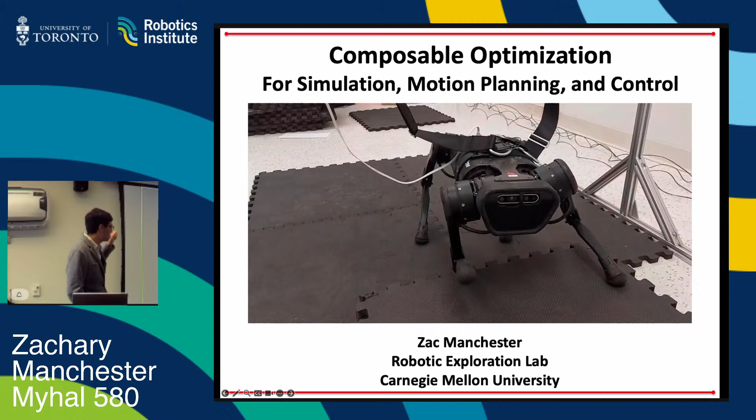So the stuff I'm going to talk about is this deep rabbit hole I got started down as a postdoc, trying to think about how to reason about contact interactions on robots, and trying to wrap my head around that. And I guess 5 or 6 years later, I kind of landed at this made-up name for this stuff, I call it composable optimization.

And the way they drive the rover, there's basically a whole team of rover drivers. When they get to a tricky spot on Mars with a big rock or whatever, a narrow passage, they basically take a bunch of imagery, and then they go out in the Mars yard with shovels and a backhoe, and they recreate the scene in this sandbox in Pasadena, and then they figure out how to drive the rover, and they practice a bunch of times until they get it just right, and then once they've gotten it just right, they uplink the commands to the rover, and it executes them.

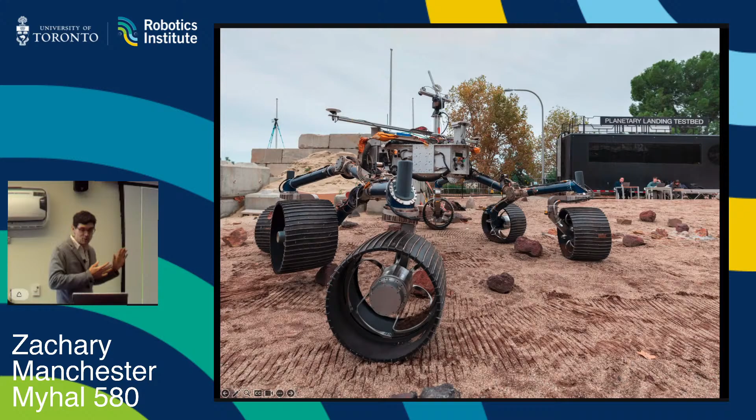So from there, I'm now going to go through a few parts to the talk.

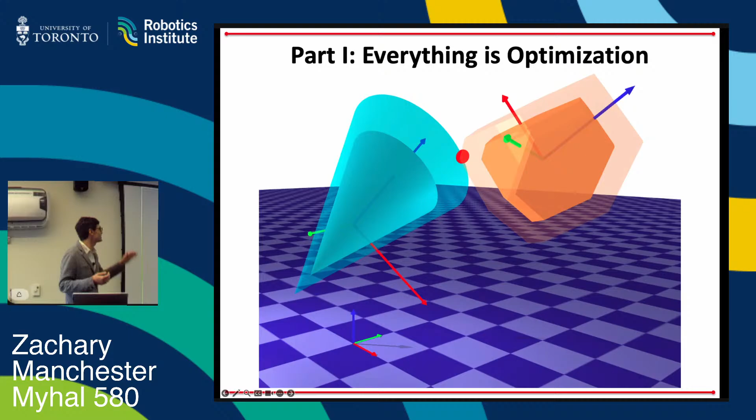Part 1, I'm gonna try to convince you that almost everything, maybe everything is a bit of an overstatement, but almost everything we need to be able to do this kind of stuff, to recreate the mountain goat with robots, at some level is optimization. So just a quick tour of things that are optimization.

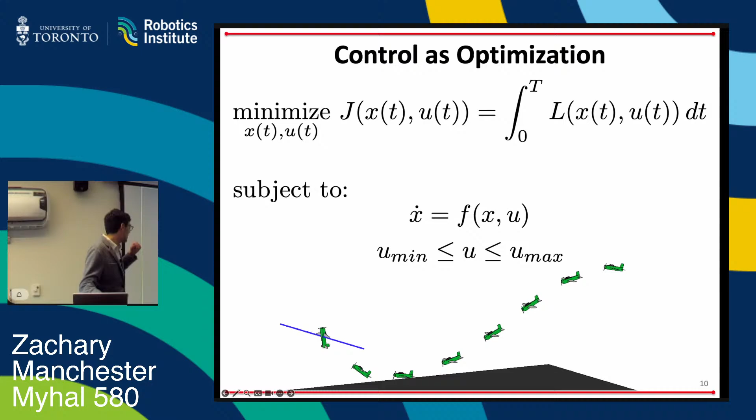The first one that I'm sure everyone is well acquainted with is control. And whether it's model-based optimal control or RL or whatever, at the end of the day, all of these come down to some kind of optimization problem. I'm more of a model-based guy, so this is the way I think typically, but this encompasses RL as well.

So you have some model of your robot, that includes maybe it's either a learned model or your F equals MA kind of stuff, and then maybe some constraints that define your actuator limits or this kind of thing, or safety. And then you write down some kind of objective function, cost function, reward function, whatever you want to call it, that basically encodes the behavior that you want. And then if things are relatively benign, you take this and you discretize it and throw it on your computer and you get an answer. You get a control policy, you get a trajectory, however you want to do that.

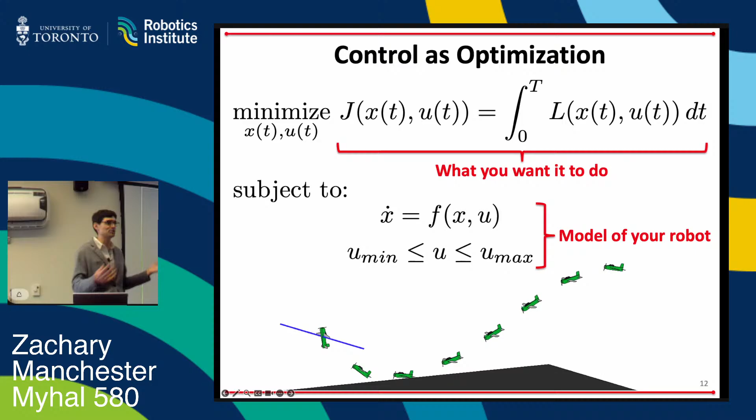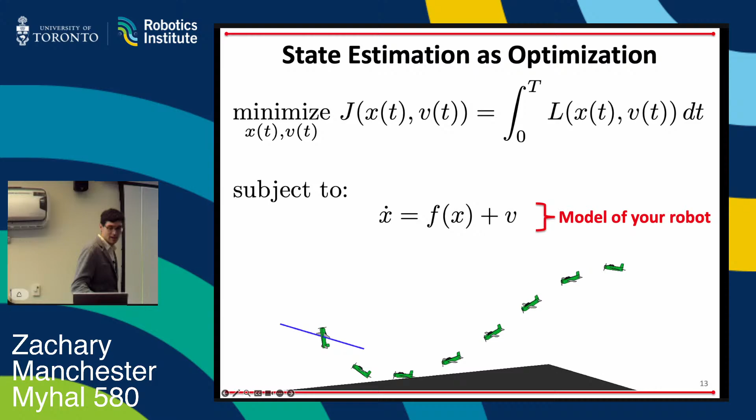So control, similarly, state estimation is an almost identical optimization problem. So figuring out where you are, pose estimation, all these kind of things, also optimization problems. Basically the same thing. This one is a little weirder, and one that, as a physics undergrad, I became acquainted with early on in life, but I think a lot of people in computer science are less acquainted with this idea. It turns out that physics is also, or can be, posed as an optimization problem.

And it turns out, this is very uncommon, but there's no reason we can't solve this problem the same exact way we solve trajectory optimization problems. We can discretize this thing in time, and then directly minimize it on a computer. Why might I want to do this? Well, this seems maybe expensive and weird, and why do I need this if I have my nice ODE solver, Runge-Kutta method, whatever. And it is more expensive, but I think there's some pretty interesting things that you can do here.

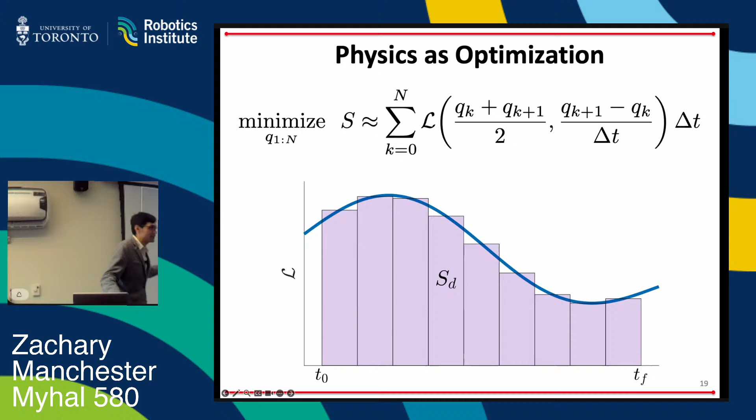So if you take this perspective of this is just another optimization problem, one of the really cool things you can do is add constraints, just like we could add constraints in our motion planning problem. And in particular, the kind of constraints that we're interested in a lot in robotics are around contact interactions. We're all maybe familiar a little bit with simulating systems that undergo contact interactions. It's terrible. You get soft contact models that are super stiff, or hard contact models that are non-differentiable.

There's all this kind of crazy stuff. It turns out that if you just take this optimization approach and double down on this Hamilton's principle, the true trajectory is the one that minimizes this cost function. Well, now I can just slap on any kind of constraints I want, and it's still a perfectly reasonable optimization problem, and we have good algorithms for solving these kind of constrained optimization problems. An example of this would be, say I have a brick, and this is the F equals MA stuff, and I want to simulate the brick hitting the ground and sliding or whatever. All I've got to do is put an inequality constraint on there that says the brick is not allowed to go through the floor.

So this would be a signed distance function that has to stay positive. And if I slap that on there and just minimize this problem, out comes impacts. And in all the ways you would expect, basically, the Lagrange multiplier associated with that constraint becomes the normal force, all the usual stuff. And it just works. And you don't have to do any weird hacky things. It's stable, all the nice things.

Similarly, if we want Coulomb friction, maybe some people have seen this before, this is called the maximum dissipation principle. A few people have seen this maybe. Same deal, it's an optimization problem. You get all this weird, nasty, non-differentiable stick-slip behavior with friction. Turns out it's just a solution to an inequality-constrained optimization problem. So if you're willing to solve an SOCP at every time step, you get Coulomb friction, it's super clean, it works, you don't have to have creep in your simulator, it's very nice.

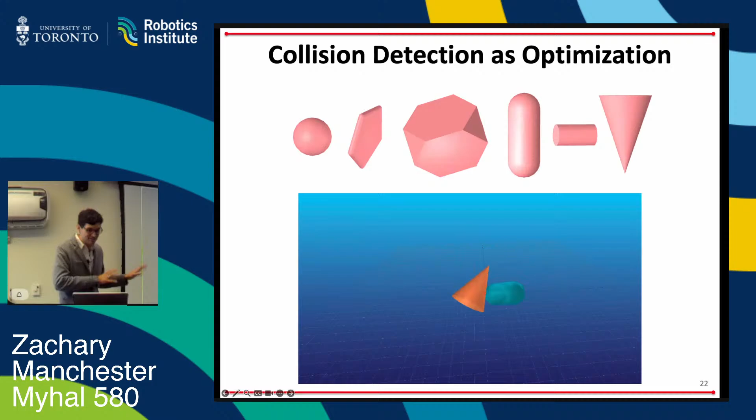Hopefully it's clear that we can do this. Okay, so if you will suspend your disbelief for a minute and trust me on that one. Then part two is, how do we put all these things together? So I just showed you, basically every single one of these blocks I can pose as an optimization problem. If now I say I want to put all that together and solve the big motion planning or control problem for a big robot, that's the mountain goat robot, right? It needs to reason about the environment and the contacts and all of its dynamics and friction and geometry and all this stuff.

If I have clean optimization formulations of each block, now I have this problem that when I go to solve the control problem, these are all coupled in really complex ways, right? So this is what I mean by composable optimization. How do I take all of these separate problems and squish them together and somehow jointly solve them all in a reasonable way to get ultimately what I care about, which is my controller, out of this thing at the end, right? Okay, so that's what we're after.

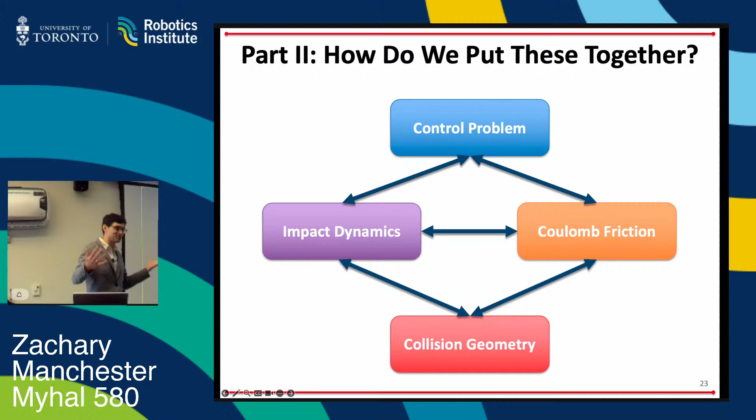The first one is the so-called hybrid approach, and what we mean by this is if you're able to pre-specify the contact switching events, so basically when I touch down and lift off with my foot, say, I can bake that into the problem and then basically ignore it as far as the optimizer is concerned and only optimize over the smooth segments between impact events. This is great. It basically gets us back to the smooth problems we know how to solve, and there are great methods that can do this. The problem is I need some oracle to hand me the contact mode sequence.

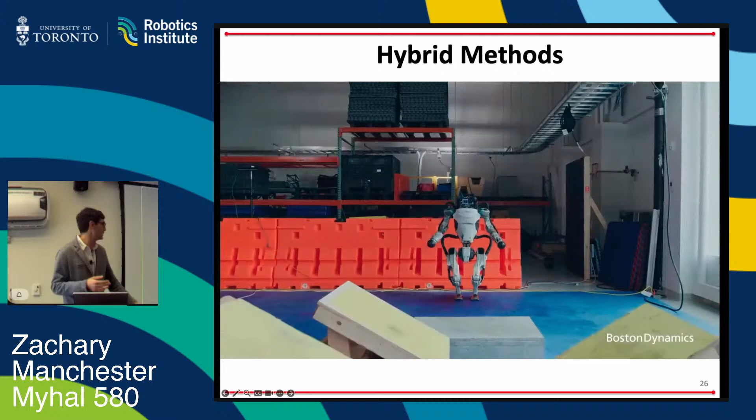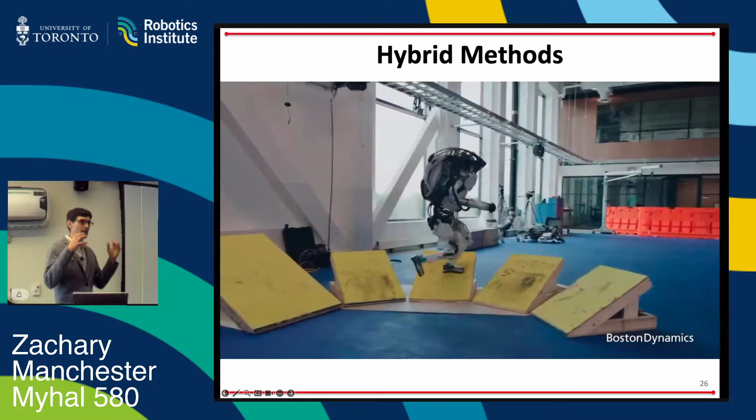Okay, so that's that. That said, these hybrid methods have been hugely successful, most notably this stuff that everyone's seen before. Roughly speaking, from what we know publicly and from friends, what these guys are doing is solving a big nonlinear model predictive control problem with a bunch of those footstep planning heuristics and doing exactly this hybrid thing. So it can work extremely well. This is the state of the art, this is amazing.

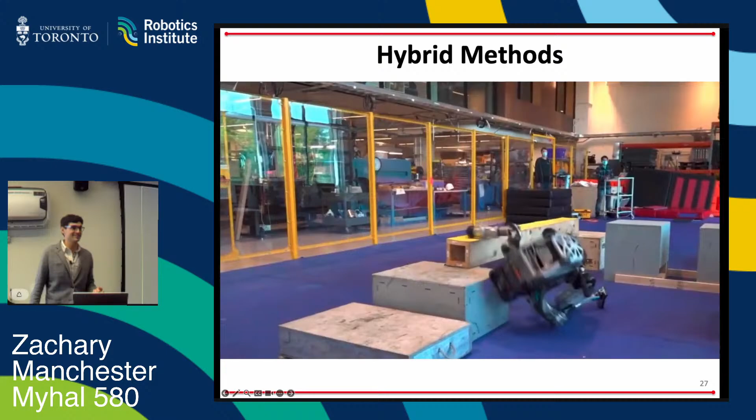That said, we've probably also seen some of these blooper reels. And if you look really carefully at this stuff, what you'll note is that most of the failure cases, especially look here, are due to unplanned contact events. In that case, it's trying to jump over, and its contact planner has said, oh yeah, use your hand, but where it grazed its foot, that was an unplanned contact event. In this kind of hybrid approach, one way of thinking about it is the controller is essentially running open loop on the contact modes.

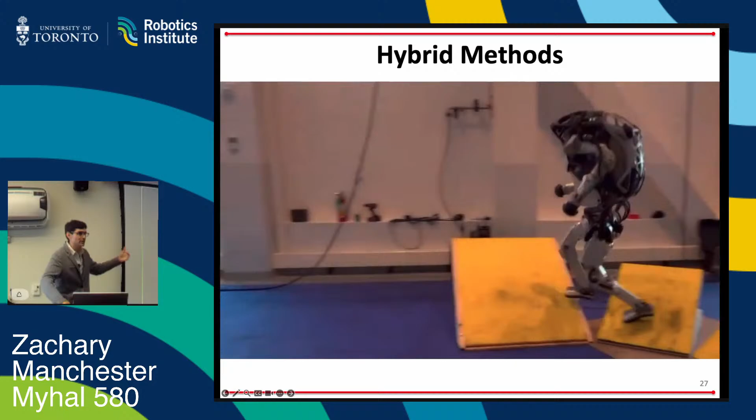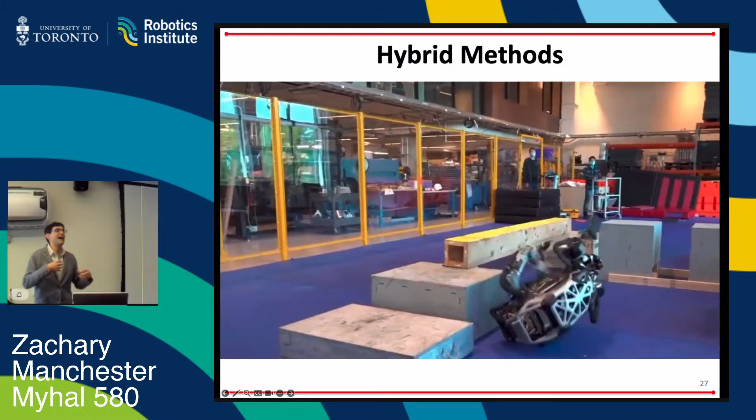So if your planner says your hand's in contact and your feet are in the air, that's all it knows about. If during that maneuver some other part of the body hits something in the environment, the controller cannot reason about it. It does not have that in the model. And so it just kind of barfs. In practice, the way you deal with this is by having all kinds of contingency plans, like, oh, this other mode might happen, and you try to run these in parallel, but it quickly becomes this combinatorial mess to deal with these pre-planned contact modes. Okay, so it can be awesome, but it has some shortcomings, this hybrid thing.

The other way to go, which is what we're now going to get into and what has been my obsession for several years, is the so-called contact implicit approach. And this is kind of the dream. The idea here is instead of having these pre-planned contact modes and effectively just optimizing over the states and controls, you also want to reason over the contact forces and all of these potential contact interactions. So there's been some work on this over, say, the last decade or so. We've done a bunch of stuff on this.

The dream here is that you can generate complex contact-rich gaits, manipulation trajectories, all kinds of stuff. But I would say so far the issue fundamentally comes down to dealing with those non-differentiable contact interactions, and there's just severe numerical issues with this. So trying to figure out a way to formulate this problem in such a way that you can tractably optimize through these contacts is the key thing here. Okay, so that's what we're trying to do. That's the framing and context for this.

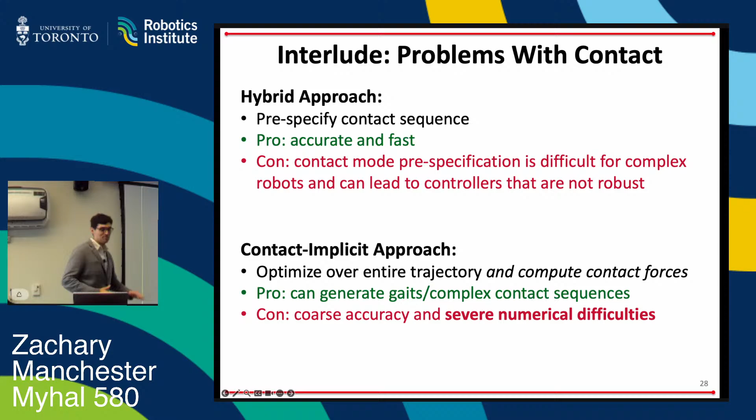Okay, so here's how we're going to do it. The key idea is that we're going to zoom in on one of those blocks, and in a very generic way, I'm going to write it like this. We have an objective function, and for simplicity right now we're going to just focus on inequality constraints, which are the impacts and things like that. We'll ignore everything else just for clarity. Okay, so I have this problem. The first thing I'm going to do is write down an interior point method to solve this problem. Who's seen this stuff before?

A couple people. So the idea with an interior point method is I take those inequality constraints and stuff them inside a function called a barrier function that blows up at the boundary of the constraint, and I stuff that into the objective function. I'll draw the picture in a sec. So I take the constraint and stuff it inside this log. The reason this works is the log blows up as you approach the constraint boundary. As long as I start with a feasible point inside the constraint set, this moves the constraints into the objective. It also takes that inequality constraint and effectively smooths it out, and you get something like this that's globally differentiable, as long as I'm in the feasible region. I also get this little parameter up front of the log, a fudge factor that I can use to tune the degree of smoothing. And in the limit, this curve approaches the brick wall and gives you the exact answer to this problem.

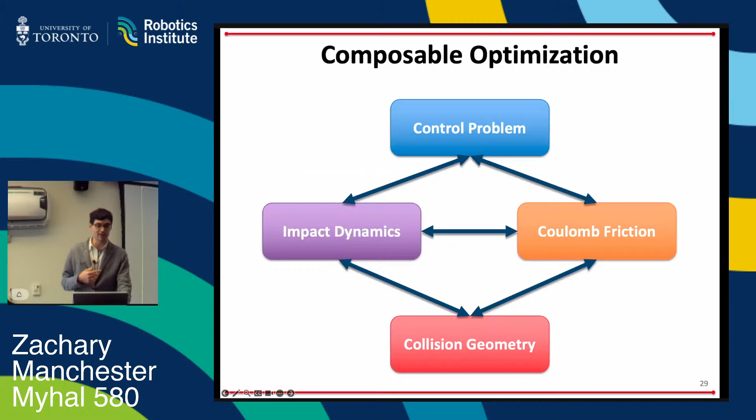So if you took those KKT conditions, can you back out what the optimization problem it's actually solving would be? Okay, so you're asking what this weird optimization problem is with all this stuff stacked up. Yeah, so it turns out we've done some work on this that I'll tease maybe later. This thing, with all these stacked optimality conditions, is actually what's called a generalized Nash equilibrium, as in Nash from game theory. So this is a game theoretic type of equilibrium. It's not a minimax, right?

That minimax thing is a Stackelberg game. So there are different notions of equilibrium in game theory. The minimax thing is Stackelberg. This is a slightly different thing. This is called a Nash equilibrium. Basically, if you imagine a bunch of players, it's like a stalemate, where the definition in the game theoretic context is that no player can unilaterally do better with respect to their cost by acting unilaterally. So it's where everyone's doing the best they can and kind of reaches this stalemate. That's the way to interpret it in the game theory context.

We've actually done some work on this Nash game stuff as well. It sort of came by: we were doing this anyway, and then I figured out at one point, by talking to a colleague who did multi-agent and game theory work, that this was a Nash game. Then we used our algorithms to go solve the Nash game problems. It was cool. So that's what it is.

The reason this is maybe a bigger deal too is that it is not a classic optimization problem. This stacked, strongly coupled thing is not an optimization problem in the classical sense of minimizing some objective subject to some constraints. What it is, is a bunch of minimization problems where I'm minimizing with respect to different variables and different constraints, and they're cross-coupled, where some variables are parameters of this one that are decision variables of that one, et cetera.

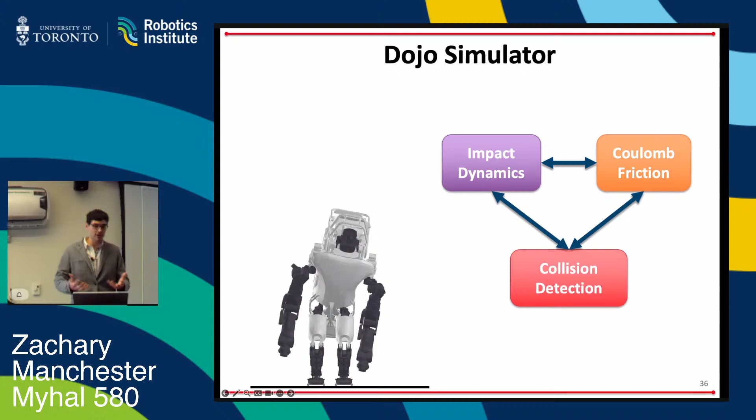It's called Dojo. And cool things about this, compared to if people have done simulation and used, say, MuJoCo or Bullet or any of these things, they all have various quirks. In particular, a lot of them have interpenetration artifacts or soft contact stuff, which MuJoCo does, right? So we don't have any of that. Another common problem is creep. This is where you're not exactly satisfying stick slip from Coulomb friction. MuJoCo also has this kind of thing where if you put something on an inclined plane, you'll always slip a little bit, and you can never get true sticking friction.

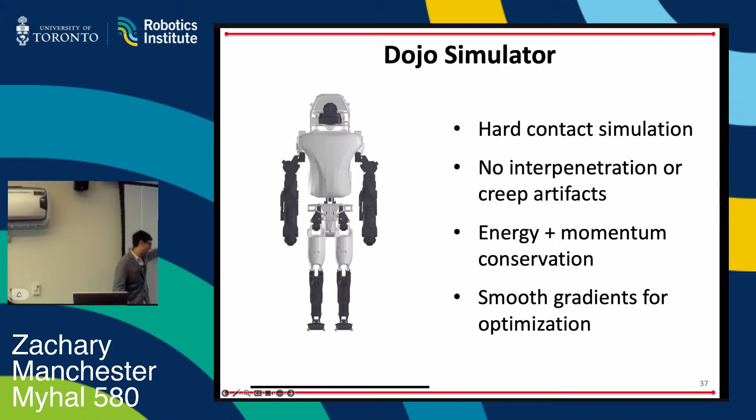So we fix that. As a fun sidebar, it turns out that directly minimizing the least action thing automatically gives you good energy and momentum conservation properties. This is not obvious, but it's cool. And then finally, taking advantage of that log barrier smoothing stuff, it can also give you smooth gradients to do whatever kind of optimization you want on top of this. This sounds like having your cake and eating it too. You shouldn't be able to do this. I'm telling you, I can give you true hard contact with no artifacts, and I can give you gradients, right? Usually, this means non-differentiable. This means soft contact model. Can't do this, right? So how do we do this?

So what I can do here, which I think is kind of powerful, is I can simulate this, and I can crank rho all the way down when I evaluate the simulation step. But as I crank it all the way down and converge to that hard contact answer, if I cache the last few solutions, I basically have access to all of these smooth versions for free. So essentially what we're doing is giving you the solution, the next time step states of the fully converged answer. But then when you query for the Jacobians or the gradients, I'm going to give you one of the cached values with a relaxed rho. And I can pick which one I want, and I can tune this and do whatever I need. But essentially what we're giving you is the true hard contact solution, but with the smooth gradient.

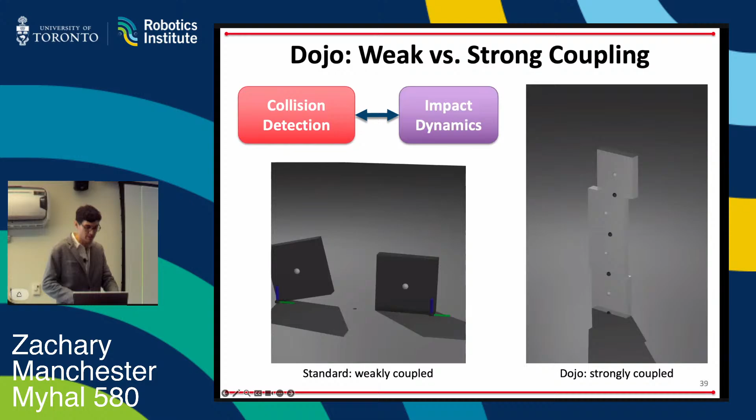And as a result, you get the right answer with the blocks balance for free. You don't have to do anything. You just stack all the physics up, stack all the geometry up, and it just happens. To my knowledge, no physics simulator currently available can solve this problem. And literally what they do, they introduce heuristic hacks all over the place to try to make that look reasonable. But the physics just isn't there. It can't do it at a basic level. Okay. So that's that strong versus weak coupling thing, why it matters.

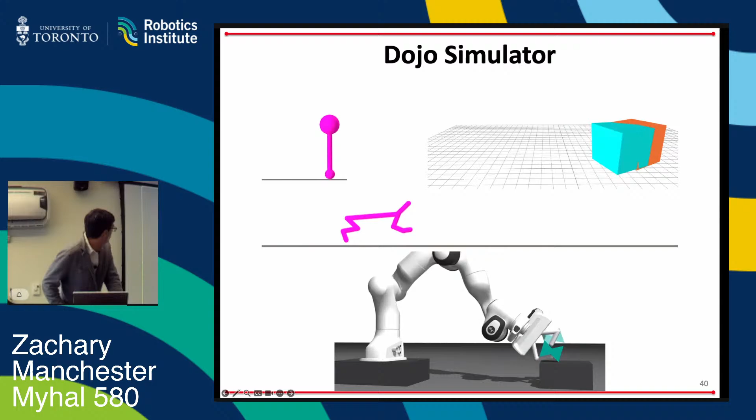Okay, so from there, now we're going to talk about putting the whole mess together. So this was, roughly speaking, Dojo, and then now we're going to do this on top of it, right? And in particular, we're going to try solving these kind of quadruped locomotion problems.

And this is actually the top left one there is old work from when I was a postdoc. And the bottom one is recent stuff that we did on top of Dojo. Issue here is these take short trajectory snippets using kind of standard solver stuff on top of this. It's really expensive. It takes minutes to solve for these very short little snippets. And ultimately, we want to be able to do this stuff in real time.

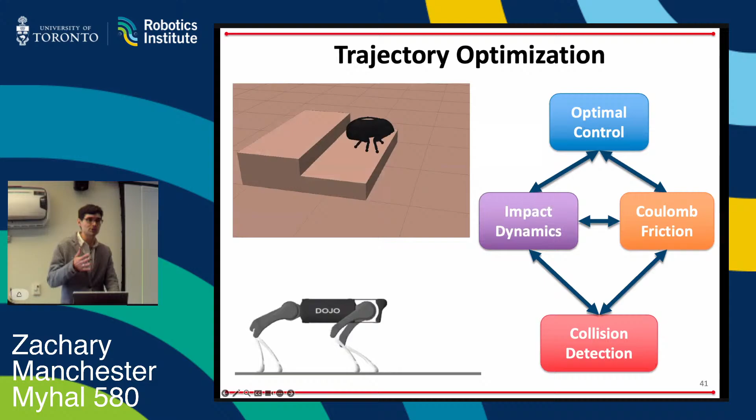So now I'm going to show you how we got this to run in real time on some robots, which is work we did last year that finally just got published in TRO last week or something, if you want to see that. So here's what we do. Take this mess. All these are relatively benign, but nonlinear and expensive to solve.

So ask the question of what can we approximate in here while still maintaining the overall flavor of this, and in particular, still maintaining the ability to reason about contact events, the ability to understand how to make and break contact with the environment and not bake that in. So what we're going to do here is try to formulate an MPC, an online model predictive control problem from this, using relatively standard ideas.

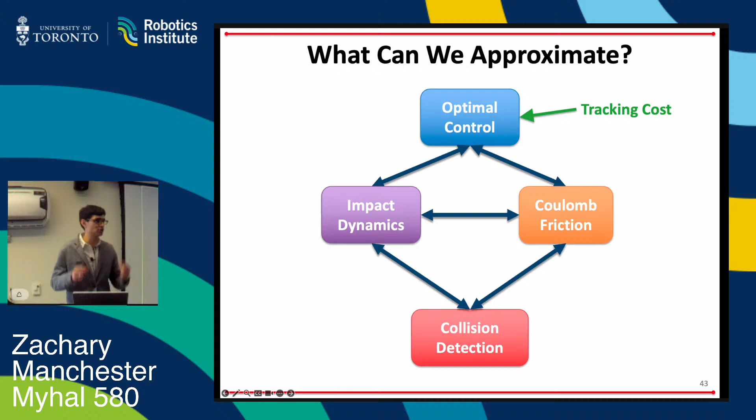So what we're going to do is say we solve this offline and we get a gait. And what we're going to try to do now is track the gait rather than solve that from scratch. So in our optimal control problem, we're going to replace the cost function there with a very simple quadratic tracking cost. Exactly the sort of thing you're used to seeing in model predictive control. So that's super benign now. It's just trying to track some reference gait, say, on the quadruped.

Next, we're going to go inside this dynamics block, and we're going to linearize the manipulator dynamics, the robot rigid body dynamics. The original problem is that least constrained least action thing. We're going to just linearize. We're not going to linearize the contact stuff in any way there. We're going to keep those constraints there. We're going to linearize the dynamics of the robot, though, just the rigid body dynamics about that reference gait motion. Sort of standard stuff.

And then in this collision block, similarly, we're going to linearize the signed distance function about the reference. So one way to think about it is we're linearizing bits and pieces inside all the blocks. So we're making each one of these optimization problems in each block a simpler, easier to solve optimization problem, but we're keeping the overall structure. And then lastly, again for speed reasons, we're going to linearize this friction cone. We're going to approximate it as a pyramid, which is a very standard thing to do.

Each one of these blocks then has an optimization problem that's optimizing with respect to its own variable, but then is parameterized on other blocks. And the arrows are denoting the coupling. The coupling, exactly. Just wanted to clarify. You got it. Thanks.

Okay, so this is all the approximating we're doing. We're keeping that Nash equilibrium stacked optimality conditions set up. We're just going in and approximating the individual problems to make them nicer. So in particular, with this approximation, this becomes an LP, this is an LP, this is an LP, that's a QP now. And then this thing up top has a quadratic, nice, clean objective, but it's constrained by the solutions of those. It's still a little weird. The whole thing is nasty, but we've made all the pieces a lot nicer.

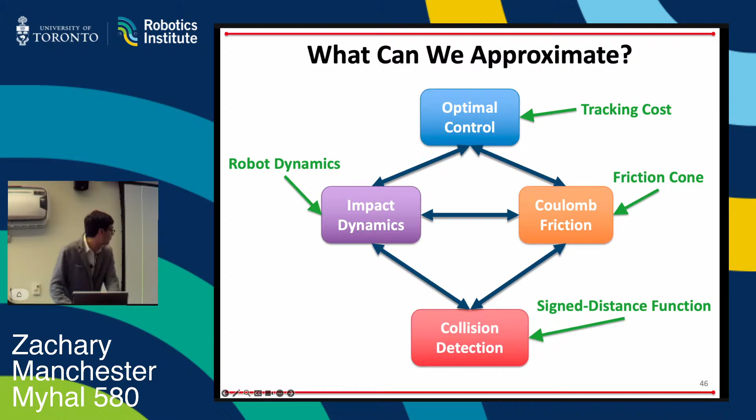And easier to solve. Okay, so we did this with all these approximations and frankly, a heroic level of implementation engineering by a couple of my PhD students. We managed to get this stuff to work at reasonable real-time rates. I'll show you some of that now. First, some simulation teasers. So we call this PunchBot.

It's an inverted pendulum, and it has this kind of ball on an arm on top. The model is a ball on a prismatic actuator that can go side to side. So this thing has a mass, and it can use that ball to balance. But it can also reach out and touch the walls. So this is basically the closest thing to convex MPC in this context you can get. Literally what we did is linearize the inverted pendulum about that upright equilibrium pose, and then linearize the signed distance functions. So it has all the information, but everything's linearized. There's no pre-specified contact in there anywhere. It just has the signed distance function between the walls like this.

Everything's linearized in the way I just described, and we just solve that MPC problem online at like 30, 40 hertz. And if I knock the thing, it knows it, just kind of emergent out of the solutions to that MPC problem. It knows that it can reach out and push against the walls when it needs to balance. Again, no pre-planned contact modes, no heuristics. It's just the problem that I just showed you. Kind of fun, like again, it can discover new contact modes online, basically, right?

This is one of my favorite simulation results. So to me, this is wild, and was like the thing that convinced me that this was gonna work and gonna be cool. What you're seeing here is a simplified quadruped model. We call this the point foot model. So it's a single rigid body for the body and then point masses for the feet. And actually, funny enough, it has the same number of degrees of freedom as a full quadruped model with all the joints and stuff, but it's just simpler to solve.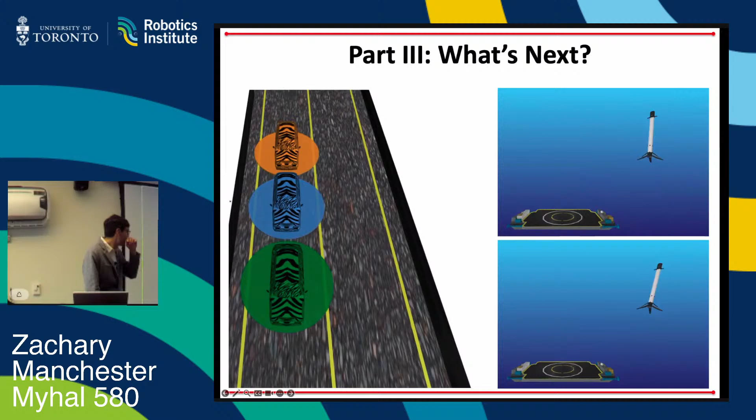But what we do in that scenario is we kind of nudge our way in there and assume, based on prior models of the other drivers, that they also don't want to hit us, and they're going to make room for us if we're kind of aggressive and nudge our way in there. If you set that up the right way, basically what we're doing here is making assumptions about the other drivers, in particular assuming they're all solving a similar MPC problem to us, with similar collision constraints and similar objectives. And if you do the same block thing like that and solve it all jointly, you get stuff like this, where you get legit highly emergent behaviors. You can reason about the cross-coupling of game theoretic, multi-agent, adversarial or non-cooperative interactions. Super natural to do in this coupled, composable optimization context. I mean, that's where it comes from originally, this Nash equilibrium idea.

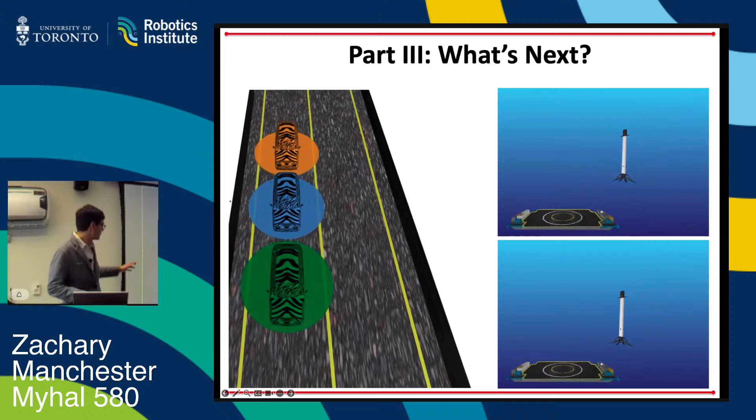Other stuff: this is some examples of robust control, like you mentioned before, the minimax kind of stuff. Also super natural to throw in this context. This is a sort of cartoony SpaceX rocket landing example where you've got fluid slosh in the rocket, and we've optimized a robust controller here that has some bounds on what that sloshing can do, and is solving this kind of minimax problem to get a safe landing to happen in spite of uncertain slosh dynamics, essentially. And we simulate this with the truth model. So there are lots of other applications in game theory, robust control, all kinds of other stuff for which this composable optimization stuff is relevant, which is kind of interesting.

Another big thing we're working on right now, which just got submitted as an ICRA camera-ready, is trying to solve these things faster. I mentioned it's super hard to solve these problems. The stuff I showed you was all on a single CPU core. Parallelizing is hard, blah, blah, blah. We really want to take advantage of the parallelism of GPUs to solve these largest problems a lot faster. And part of that effort is just trying to solve, as a starting point, QPs on the GPU. This is a paper called ReLU-QP, just a fun advertisement, I guess. The idea here is that we figured out a way to reformulate an ADMM solver. If you're familiar with OSQP, it's based on the OSQP algorithm.

We figured out a way to turn that exactly analytically into a deep weight-tied ReLU network in closed form, and then you throw it at PyTorch and throw it on the GPU and get dramatically faster solve time. So this is doing Atlas in that demo at like 2.5 kilohertz, the full body model with all the torques and everything, which is wild, and an order of magnitude faster than the fastest CPU-based solvers. So that's kind of cool.

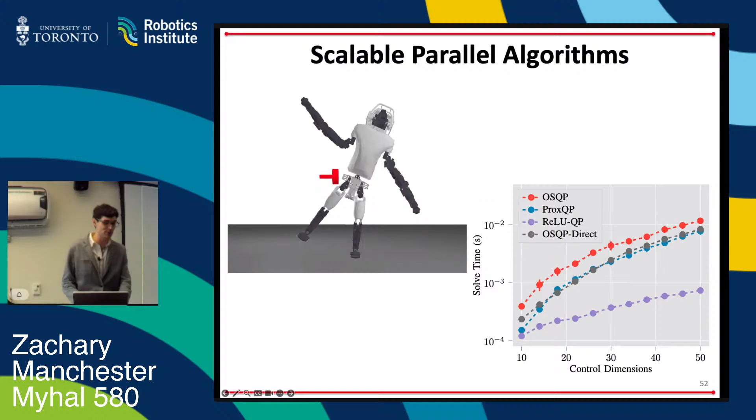And then, yeah, we're also getting into manipulation-y stuff. This is, again, very similar to what I just showed you. This is actually the collision stuff. But the idea is that classically when you do these LCP methods, it's standard to use point contacts on the robot with the environment. And the idea here is I know the robot geometry really well a priori, so I can do that convex decomposition of the robot body very easily into pills and capsules and boxes, and here's the grippers basically. The environment though, I don't know a priori, and so using convex decomposition on the environment may be a bad idea.

So here what we're doing is modeling the environment geometry as a point cloud, and we're explicitly using the point cloud to do all of the contact calculations, force calculations, etc., to grasp the bunny and whatever you can imagine. The idea here is that you could use raw point cloud data from a LiDAR or something and just throw it into your simulator or your MPC thing and reason over it very directly. Kind of cool. And we've also got some state estimation stuff that's cool.

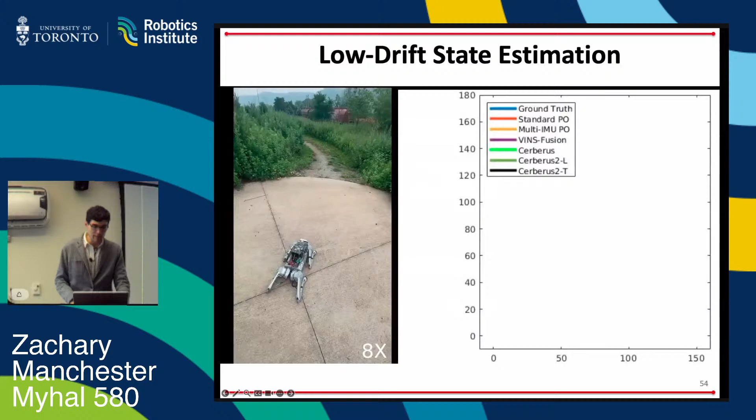That's trying to reason better about contacts and foot slip, stuff like that. This is actually about to go into TRO. And then yeah, this stuff.

The idea here is, I guess you could call this real to sim or data-driven simulation. This Dojo thing is fully differentiable, and we've done a little bit of teaser stuff. But the dream here is to be able to take data from the real robot and look at the model mismatch, and then feed it back into the simulator and actually improve the geometry, actuator compliance, friction, all the messy stuff that's hard to model with a classical rigid body model, and pull it back into the simulator so that maybe next time you don't have to do transfer learning or whatever, right? And again, the differentiability here helps you.

And in principle, in all these places, you can strategically bury function approximators, whatever you want, right? Okay, I will shut up now. I think I've gone a little over time, sorry. And also a bunch of these awesome people did all the hard stuff.

All right. Awesome. Who has a question? Yeah, great talk.

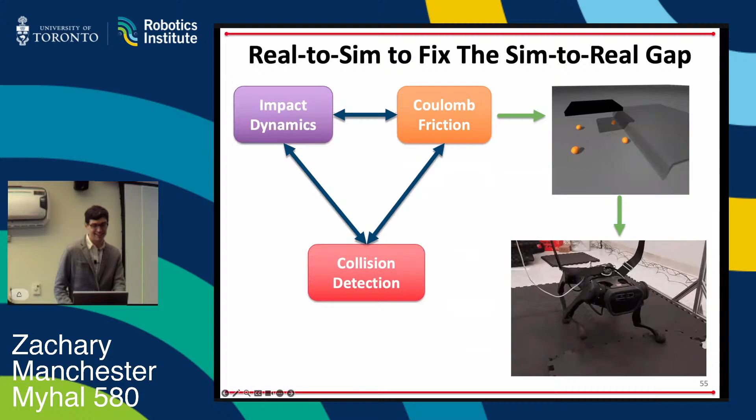I do some similar work. I do object placement planning using optimization, and my approach is also physics-based. One really big problem I have is knowing where the contact points are for contact-rich manipulation. With the Stanford bunny you showed, there were two little animations, and the bunny did drastically different things. The outcome was really different, although initially the robot was pretty much in the same pose. Let's see if I can play this again. So one is rotating and the other is not, right?

Yes. And so this is because the contact points are not exactly at the same place. Yeah, so this was a workshop paper from IROS, and I didn't tell you what was going on here, and I just threw the video in because I was lazy. Sorry, I was rushing. I'll tell you what's going on.

So in the rest of your presentation, spheres are used for toes, and even in small toy problems, because spheres are nice, it's basically a single contact point, we know where it is, we can model the reaction forces really easily. Now with the Stanford bunny, it's very different, right? You don't know exactly, plus it's probably some kind of soft contact going on, a little bit.

Compliant. Yeah. So let me explain what's going on here. I want to know how you would approach the problem of dealing with not knowing where the contact points are. Yeah, so this is a fantastic question. There's always geometric uncertainty in these things, right?

One of the arguments I hear a lot for soft contact models, like in MuJoCo, is that rigid body is an approximation and everything's really a little bit compliant. And this is actually very much embracing that idea. The one on the left is a standard point contact model. One of the things that happens there is that you're gripping at 2 points, so there's no torsional friction or whatever. The one on the right is the exact same point cloud, same everything.

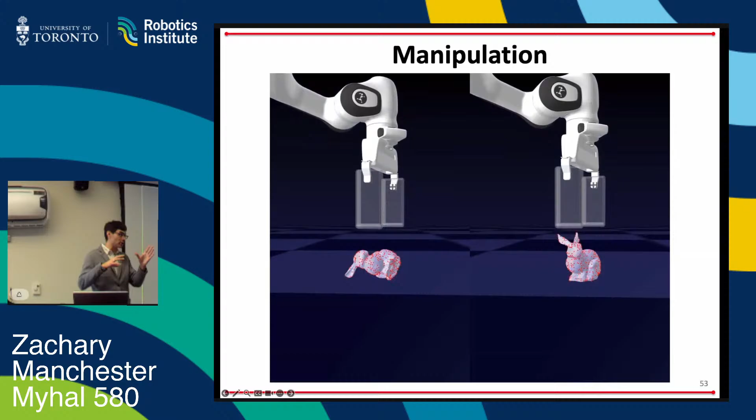But basically, if you were to use something like a quadratic penalty, that would directly correspond to some kind of spring damper model, where it's allowing some interpenetration, but then giving some kind of restoring force. This is what happens in MuJoCo or a bunch of these other simulators, right? So that's what's called an exterior penalty versus an interior point method or barrier method, right? And it comes down to the algorithm, in the interior point barrier case, cannot allow interpenetration by construction, whereas an exterior penalty method embraces interpenetration as part of the algorithm and gives you a way of computing the way out, right? So what you're talking about, the slack variable, is a good idea.

In fact, we do this because in a lot of cases, like if you're doing state estimation, for instance, it's really hard to guarantee feasibility. If I'm trying to do state estimation and I have this random noisy thing, and then I try to take that and plug it into my simulator, it's very possible to get infeasible states that have a little bit of interpenetration given noisy measurements. And this will make the thing barf, right? So if you know a lot about interior point methods, you may be familiar with infeasible start interior point methods, which if you go read the textbooks, almost all modern interior points do this.

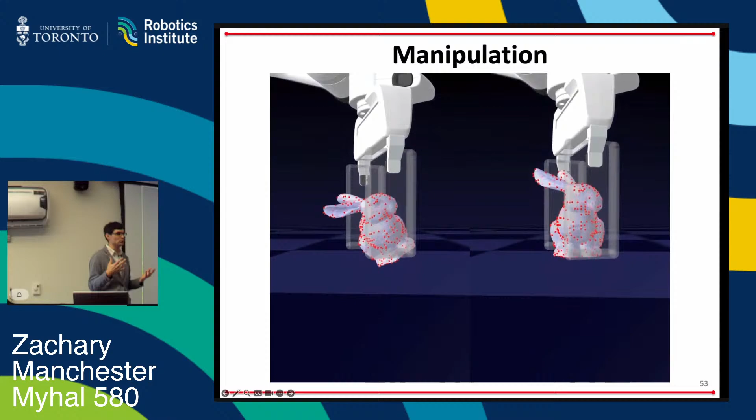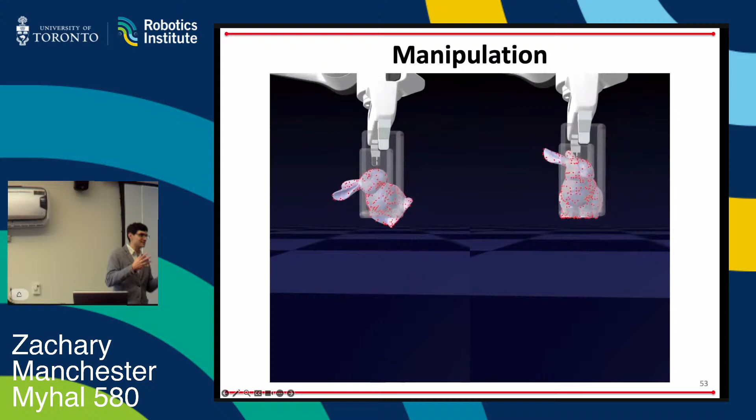And what that does is exactly what you said. It introduces slack variables, and you impose the constraints on the slacks. And then you have equality constraints setting the slacks equal to the real stuff. And what that lets you do is have an infeasible initial guess that doesn't have to strictly satisfy the constraints. So you're totally right. I glossed over that a little bit. We are doing that, and it helps a lot in practice. And I guess, practically speaking, that is introducing some kind of restoring force type thing, but the difference is that we solve these things to convergence, every time. So we're basically always iterating the slack stuff out. After a couple of iterations, it's always strictly feasible. The solutions are always in the feasible region.

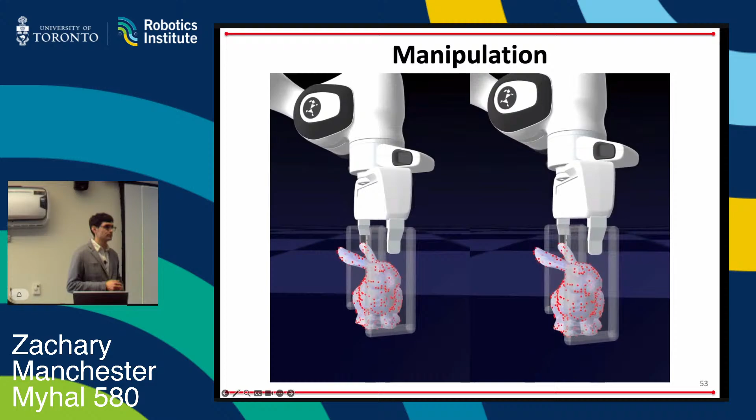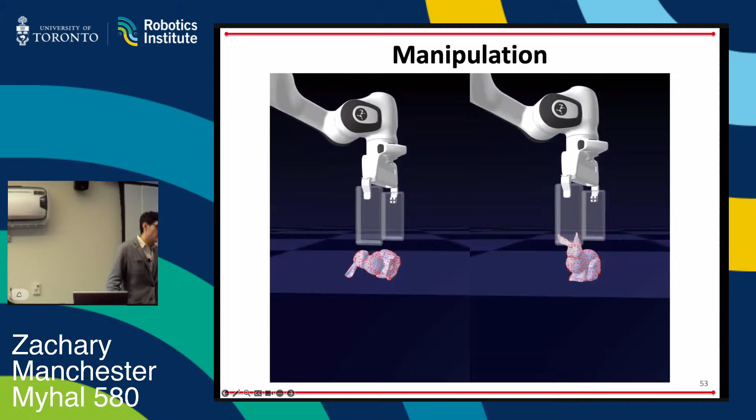And sorry, the second question, I'm being selfish. For the MPC that you presented, you said you were linearizing around the reference trajectory. Is there anything that anecdotally you had to do to the reference trajectory to make sure your linearization didn't break?

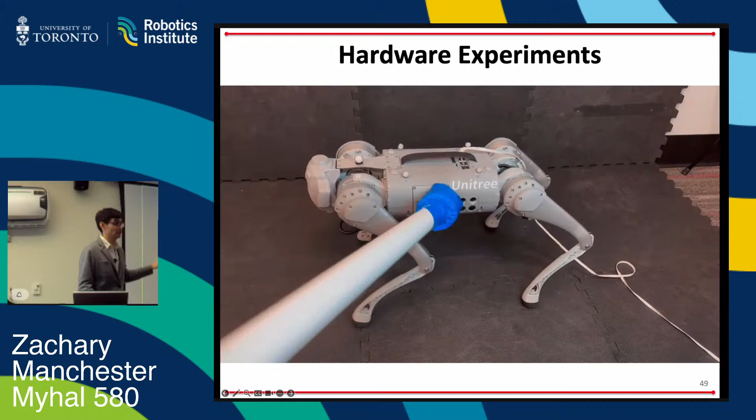So no, although you almost certainly will; there are always caveats to stuff. This stuff is actually surprisingly clean. Honestly, there are very few hacks. There are tons of hacks in the implementation to get this to go fast. We did insane stuff that I won't get into here. It's ridiculous, but yeah, surprisingly good.

And I think, honestly, this is the demo that really convinced me of this. At the end of the day, what we're trying to do here, as a classical control guy who likes convex things, convex MPC is insanely good. Linear models are insanely good if you respect where they are valid. I teach a class on this stuff, and I love the classic Art Bryson quote: be wise, linearize. It's true. You can make insane things happen with convex MPC.

We got drones doing aerobatics and crazy stuff. It's super, super good, if you know how to do it. The linear models are super powerful, and I think there's lots to say about that. One take is that the models are all approximate anyway, so if you can get away with a linear model, you should. And I think that's really borne out here.

Everything in here is locally linearized. We're keeping the overall structure, but we're solving LPs and QPs in each of those blocks for speed reasons, and it's insanely good. It can do crazy stuff that I would never imagine: fly through the air, reason about push recovery, trot back to where it's supposed to be. All of that just comes out for free. We didn't do anything weird or heuristic there. So, thank you very much.

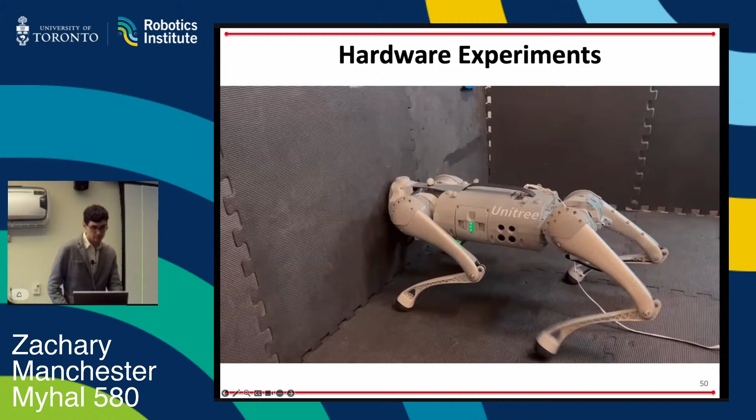That said, I think there's tons of good stuff to do even there, where you decompose it and treat it as a stack with some pieces that are neural networks and some pieces that have physics models. That's kind of what's going on here. What I think is really interesting is that, given this whole differentiable pipeline, we can train end to end. We can train on the end covariance and pose coming out of the estimator, where we write down the estimator with the dynamics model and take gradients through the whole thing for the neural network training. Our students are getting into that now, and it definitely fits into the story.

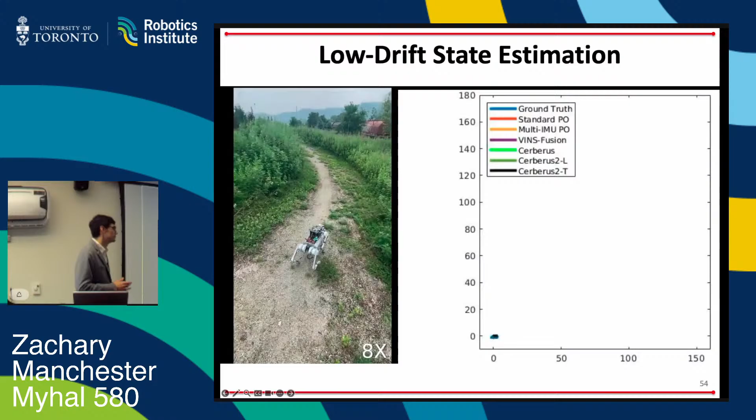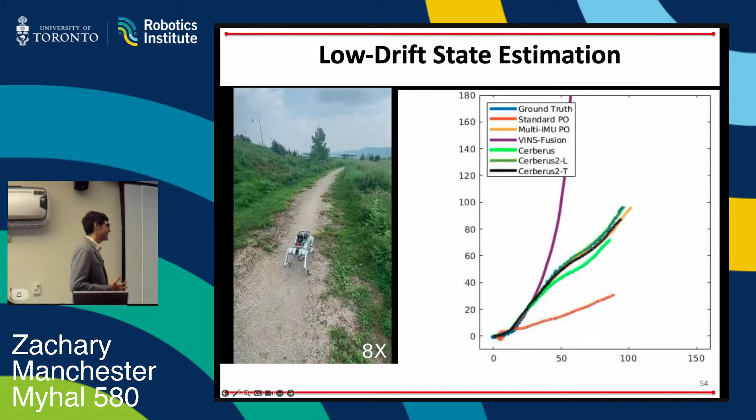There's also lots of other work on convex layers and all this stuff. This idea of differentiating through optimization problems and embedding them in learning algorithms is not novel, and it absolutely fits. Compared to methods that would apply something like expectation maximization for these types of problems, would you prefer end-to-end optimization, like the philosophy you're describing here, or something like EM where you separate these? That's an interesting question. We've done both, and I wouldn't say I have a super strong take on that at this point. Still thinking about that one.

Gotcha. There's one question from online. A student is asking, what's the best environment to create a high-fidelity robotics dynamic simulation with flexible bodies? They said they've thought about Craig-Bampton and reduced modal representation. I do not have a good answer for this. It's the Wild West.